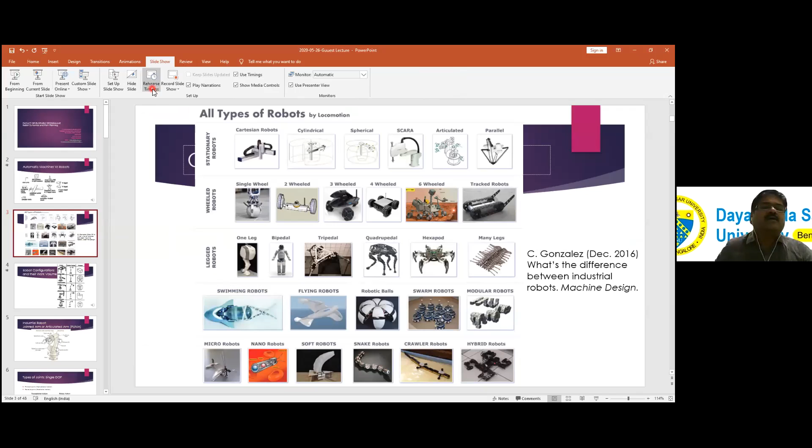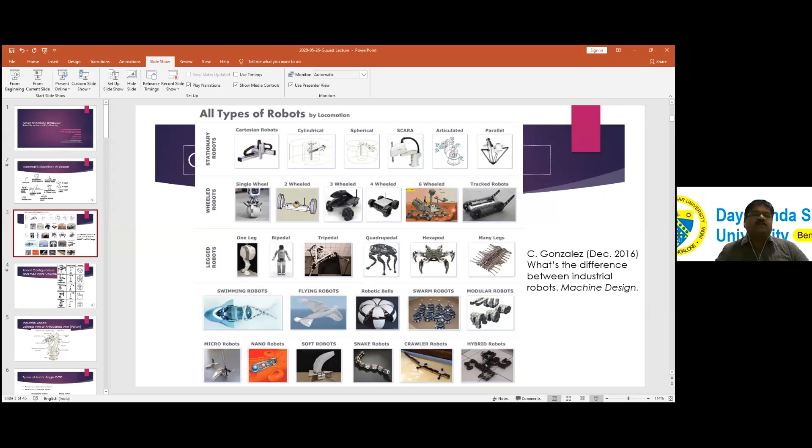By locomotion, we can classify robots. The first row are stationary robots, mostly used for industrial applications, depending upon the motion of the axis - in CNC machines also you call it axis. A Cartesian robot will move along the X, Y, Z axis, similar to a microscope used in the lab.

Cylindrical robots will have a vertical prismatic axis, and also rotational motion about the same axis, plus one linear axis. Spherical axis robots will have motion along a spherical coordinate system, with theta, phi, and the radial length r.

SCARA is another type of robot, usually used for low load applications. All the joints will be rotational except one prismatic joint, which may be either in the end effector or near the pillar as the first link.

This one is a Puma type of industrial robot, widely used in automobile industries. A lot of packaging industries, especially food packaging industries, chocolate packaging industries, and biscuit manufacturing industries use it, because their load is very less - a biscuit box or chocolate pack does not weigh too much. So for that, high productivity of assembly and packaging is required.

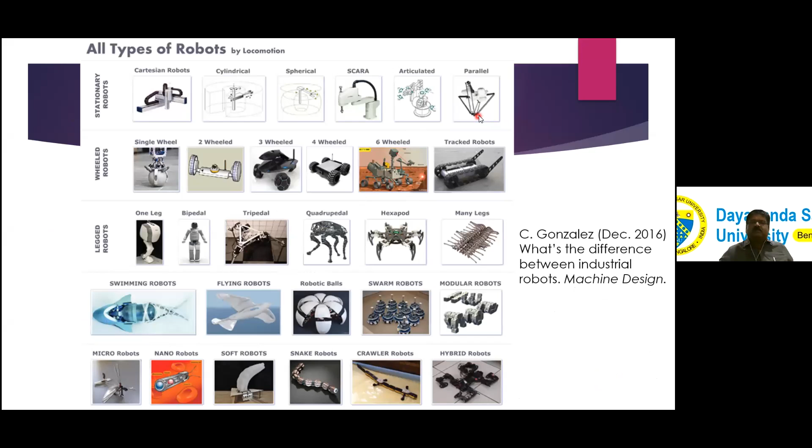So why do we need parallel configuration? For example, if you want to carry only a water bottle, you need only one arm. But if you want to carry a chair, you need to carry with both the arms. And if you want to carry a table, even if you use 2 arms, it's not sufficient. You need 1 more person or 2 more persons to support this.

This is called parallel manipulation. Parallel manipulation means more than one system, or one robot or branch of robot, is required to carry an object. So when the object is very long or very heavy, one robot, one or two motors may not be able to support the load.

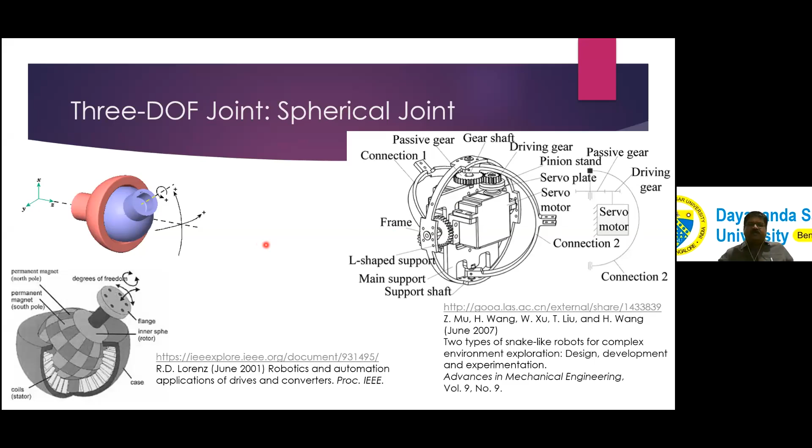A 4-bar mechanism cannot be used for robots, but you can see this kind of configuration. So let me just work out something. Please just wait for 5 seconds. Oh God, I don't see my mouse. Okay, so you see something now.

So this is called a 2-link robot, link 1 and link 2. This is a serial chain robot, because I'll have a motor at joint 1 and a motor at joint 2, only 2 motors will be required. It's a 2 degree of freedom system, because theta 1 and theta 2 will define the motion of the tool connected at the end effector. End effector is a general terminology to mean the tool.

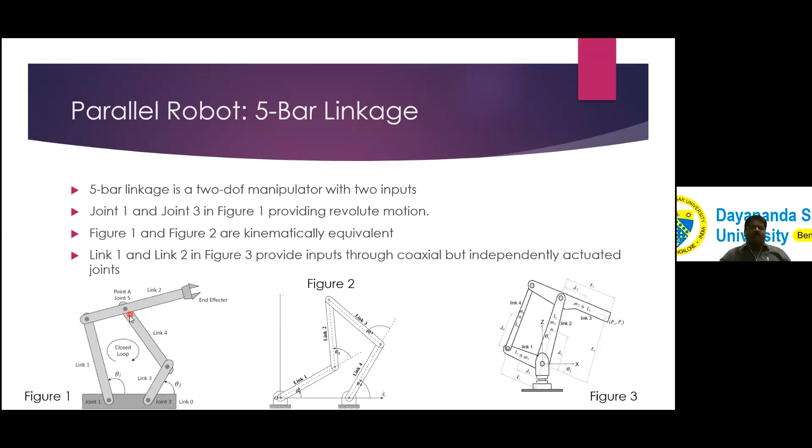Now look at the parallel robot configuration. Some of the joints will be idle joints, meaning they will be passive joints, versus active joints. Look at the picture here: joint 1 is active, there will be a motor; joint 3 will be connected to a motor. So joint 1 and 3 are active joints. This joint here, for example joint 5, will not have any motor, no power input, no torque input at joint 5 - it's called a passive joint. So parallel robots will have many passive joints and some active joints.

Another application is a 6-legged robot developed by IIT Bombay some 17-18 years ago. Here you see each of these legs is similar to a 5-bar linkage. This is called a parallelogram mechanism configuration, similar to a mini drafter, for example. Each leg is modeled after a mini drafter or 5-bar linkage. The advantage is you don't have any motor in the knee - the motors can be kept in the main chassis of the robot.

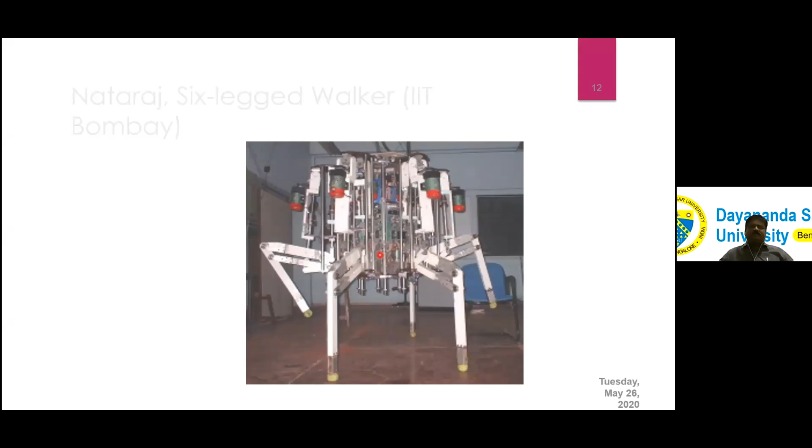But this robot gets signals from what is called a brain computer interface. It gets signals like EEG, from a lot of electrodes. These electrode signals are obtained, and they are decoded using artificial intelligence to find out what the person wants, whether he wants to raise his arm or lower it, whether he wants to open or close the fingers. Nobody can program these robots directly, so every motion of the artificial arm will be different every time; they will not be repeated.

Whereas in an industrial robot, the same operation is repeated thousands of times, so this is a different requirement. But even here you have to find out what happens if a robot joint moves faster or slower than required. Then it will fly away from the human person wearing it. So dynamics is very important here.

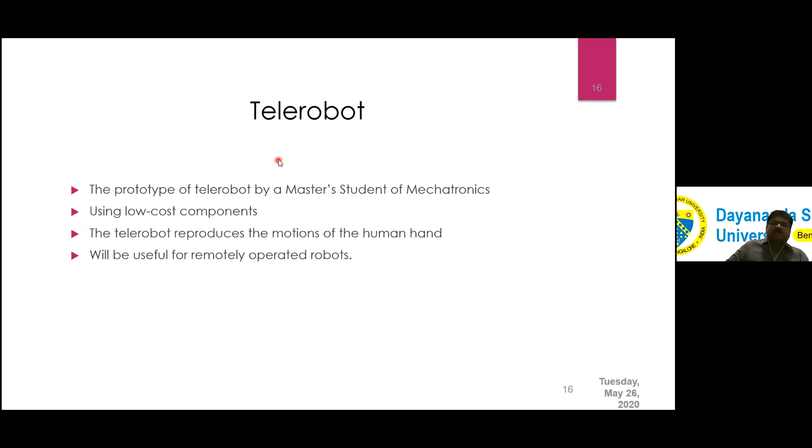You can use software like MSC ADAMS. ADAMS stands for Automatic Dynamic Analysis of Mechanical Systems. Any problem we discussed in mechanics of machines or mechanism analysis, whether kinematics, dynamics, vibration problems, or impact problems, can be done using ADAMS software. This software is now owned by MSC; it was originally developed by a professor at a foreign university, but MSC software has taken over.

So we use this software to model a biped robot, a two-legged robot - below the hip, only two legs connected by a common chassis, no upper body. One advantage of using the software is you don't have to know too much about the theory behind robot analysis; you just model the mechanism in the software. A little bit of basic theory of mechanisms is still useful, to understand the results produced by the software.

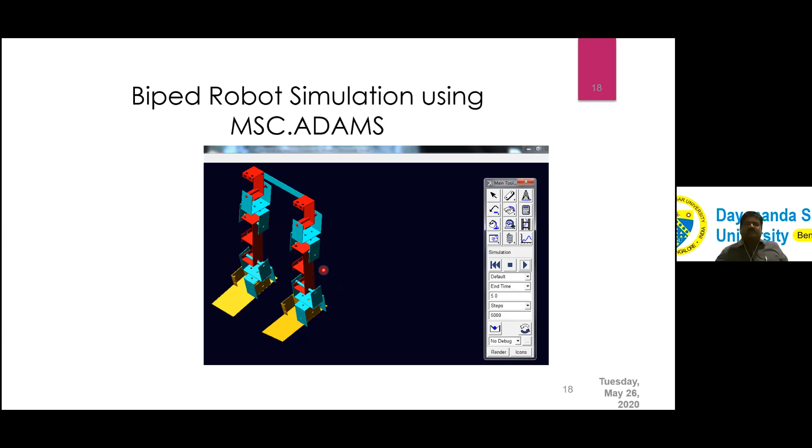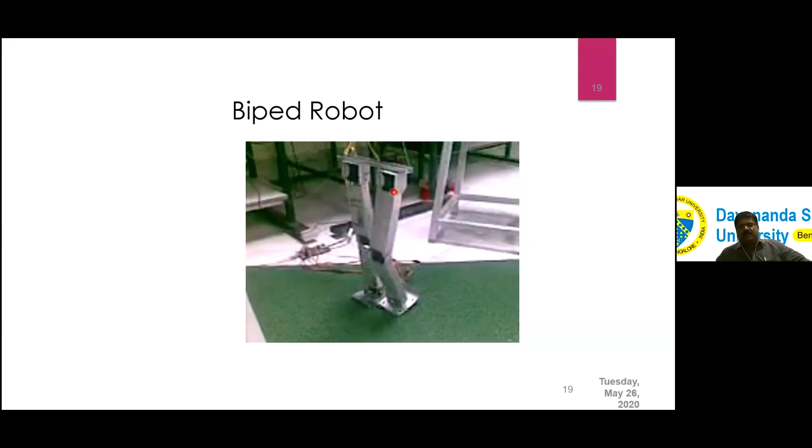This uses some low cost material and low power motors. We developed the structure using aluminum frames. But the problem with this structure is it cannot walk effectively, because the small servo motors we used may not be able to support the required amount of power. But we used it for studying the kinematics and making an initial prototype.

Now I will venture quickly into robot kinematics. We have 10 minutes left. I don't mind spending some more time, but I don't know, the audience may be impatient. So at this time, I'll give a break of 1 or 2 minutes for questions. It's not a coffee break, but we can have questions.

Yes sir, Mamakesh, Professor Elilarasu, can I ask? Yes sir. I have one clarification. Hello, am I audible sir? Hello, organizers, am I audible? I am Professor Ederson, sir, am I audible? Looks like somebody, I think Mr. Satyamurthy K, I don't have the power to enable your mic, so can you chat? Satyamurthy Garu, you can ask now to the speaker. Only the organizers can enable your mic, yeah your mic is enabled, you can please speak. Yes, just now enabled sir. Satyamurthy Garu, you can talk now, your mic is disabled again. You can speak please. I don't hear anything, please text your question. You raised your hand, please text. Ederson sir, you can talk sir. Yes, this is Dr. Ederson, am I audible sir? Hello? Or you can call my number on phone. Mamakesh? Yes sir, sir is not getting my voice I think so. Oh, everybody is at home, including the organizers. Hema Magesh, I think I see some Ilamaran, was he my student? I don't know. So you feel free to text, I don't know whether you can text, there's a chat option. So anybody else from the audience, any questions so far? Okay, I'll just move ahead.

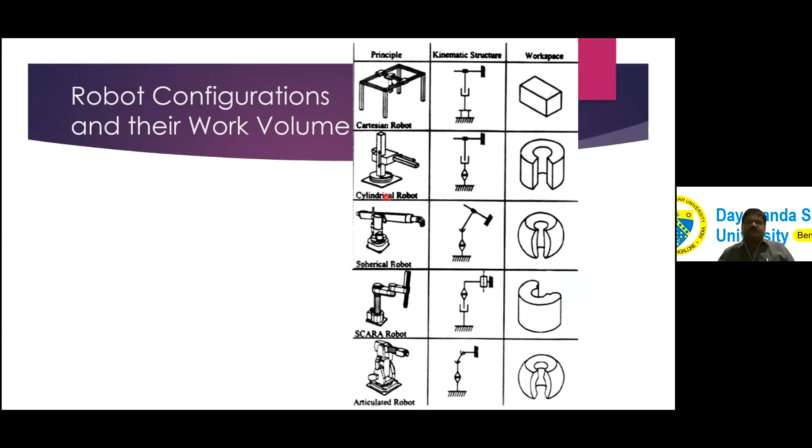Each joint, J1, J2, J3, are all angular joints in Puma. In the case of Puma, all joints are rotational, revolute joints. Each joint position is denoted by theta I; for joint I, the corresponding angular position is theta I. So you have theta 1, theta 2, theta 3, theta 4, 5, and 6. Joints 4, 5, and 6 are wrist motions, which are tool rotations and tool orientation.

In fact, J4, J5, and J6 together contribute the equivalent of a spherical joint. J1 is called the base axis, J2 is the shoulder, J3 is the elbow. J4, J5, J6 are the wrist joints.

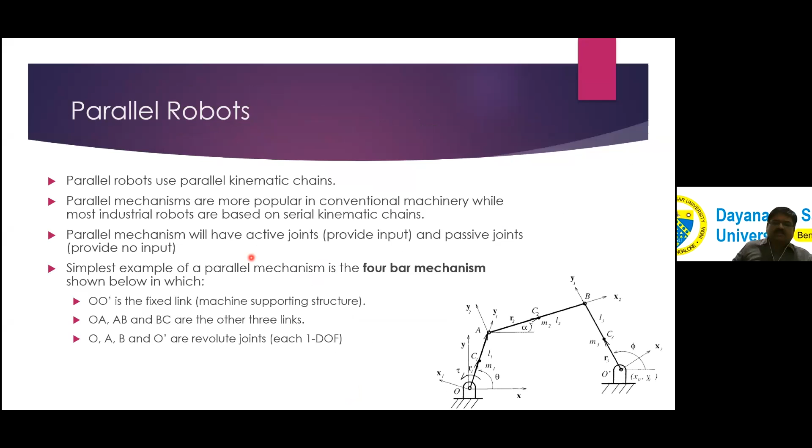Now, what is the purpose of position analysis? When the robot is in motion at very high speed, theta 1, theta 2, theta 3, up to theta 6 are all functions of time. They keep on changing every fraction of a second. So let's say, when the robot is operating at very high speed, I take a photo only, not a video. Then theta 1, theta 2, up to theta 6 have specific values. For given specific values of theta 1 through theta 6, I want to know the position and orientation of the tool. That is called position analysis.

What is velocity analysis? If J1 is rotating at angular velocity theta 1 dot, J2 at theta 2 dot, etc., up to J6 rotating at theta 6 dot, then what is the speed at which the tool is moving? The tool moves at x dot, y dot, z dot linear velocities, and also has pitch angular velocity, yaw angular velocity, and roll angular velocity.

J4, J5, and J6 together are called pitch, yaw, and roll. J6 is the roll; it rotates about its own axis. J5 and J4 are a combination of pitch and yaw motions. Pitch means up and down motion, yaw means left and right motion, and the sixth axis is roll motion about its own axis. That is velocity analysis.

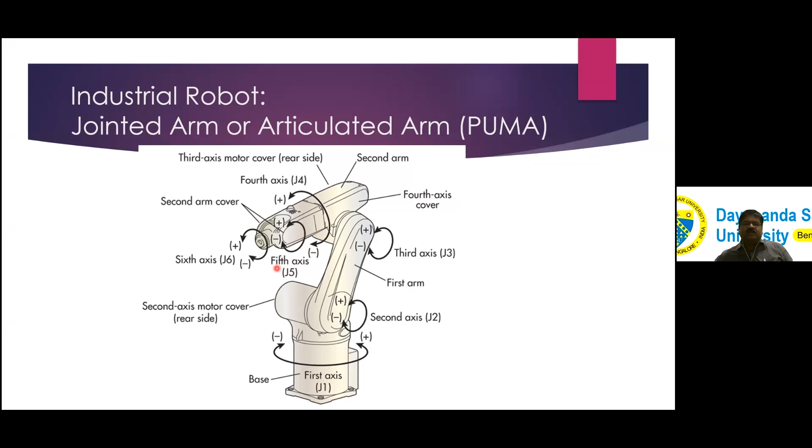So equations of motion form a set of coupled second order ordinary differential equations. Their derivation is done by two methods: one is the Lagrangian formulation, which is conceptually very simple, whereas the recursive Newton-Euler formulation is conceptually complex but easier, and it can be done in an iterative fashion.

Lagrangian formulation is easy for small systems—for example, to derive equations of motion for a simple pendulum, double pendulum, or 3-link pendulum. But for a snake robot, Lagrangian formulation would take weeks and has to be derived manually, whereas recursive Newton-Euler formulation may be computerized. In fact, a robot controller may continuously evaluate the Newton-Euler formulation. Using these methods you can derive the equations of motion, which is nothing but robot dynamics.

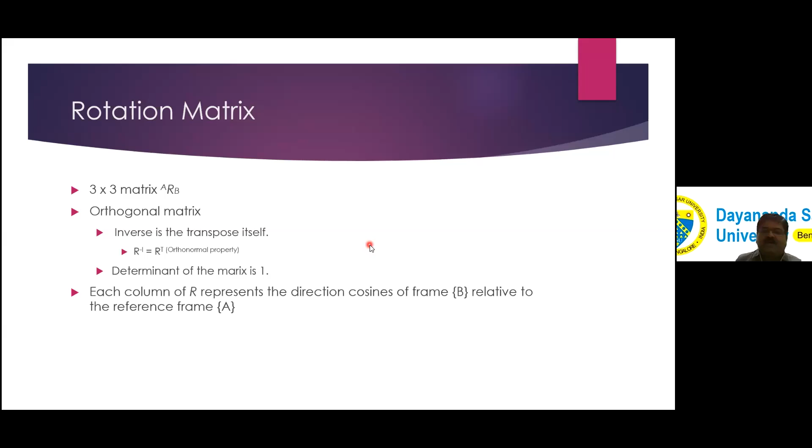The rotation matrix is one thing used for kinematic analysis. The rotation matrix is a 3x3 matrix, an orthogonal matrix. Its determinant is 1, and the combination of these two properties is called an orthogonal matrix. Each column represents the direction cosines of frame B relative to frame A.

Now why do we need the rotation matrix? Suppose I have an inertial frame or reference frame A, whereas the tool or object is held by the robot, with its position and orientation. Now each object or tool handled by a robot is of different size, shape and geometry. Therefore, mathematically, they are replaced simply by a coordinate frame. Similar to how every student is identified only by a roll number or registration number, every glamorous actor is identified only by vital statistics. Like that, we replace the actual body by a coordinate frame, because we are now interested only in the motion.

So frame B is called the body frame. It represents any body handled by the robot, a rigid body. The bodies are assumed to be rigid bodies. Any frame A is assumed to be a stationary frame. But their roles can be changed — A can be a moving frame, B may be a stationary frame. It doesn't really matter whether A is stationary or B is stationary, or whether both are stationary or both are moving. The only thing is one is the reference frame, the other is the moving frame.

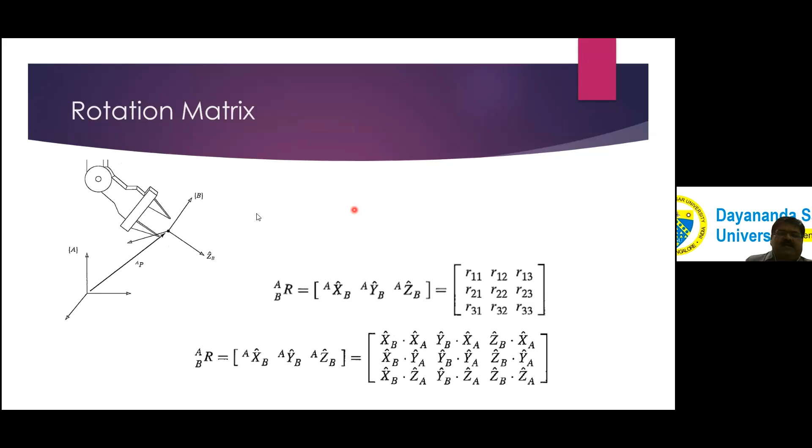Okay, so between B and B dash, some rotation has taken place. So we can have a rotation matrix of B dash relative to B. Then we have a rotation matrix from B to A also. Both of them can be multiplied together to obtain the rotation matrix of B dash relative to A. This is called finite rotation. Finite rotation matrices are used to describe the position of points referred in one frame with respect to another frame. Now, this finite rotation can happen in a sequence.

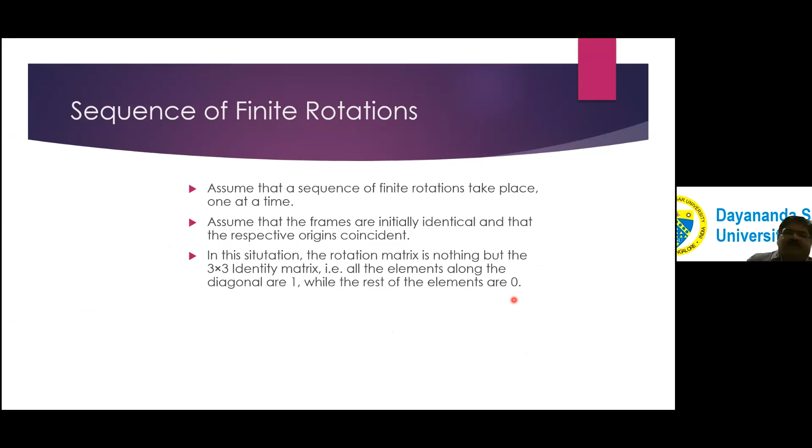I'll give you an example of a DH transformation. There are certain rules. Initially you assume that the rotation matrix is an identity matrix. That means initially you assume that both the reference frame and the other frame are one and the same, therefore the rotation matrix is identity matrix. If the rotation occurs about an axis of the reference frame, then pre-multiply the rotation matrix. Otherwise, post-multiply. Repeat the above rules until all finite rotations are considered, and the resulting rotation matrix is called the composite rotation matrix.

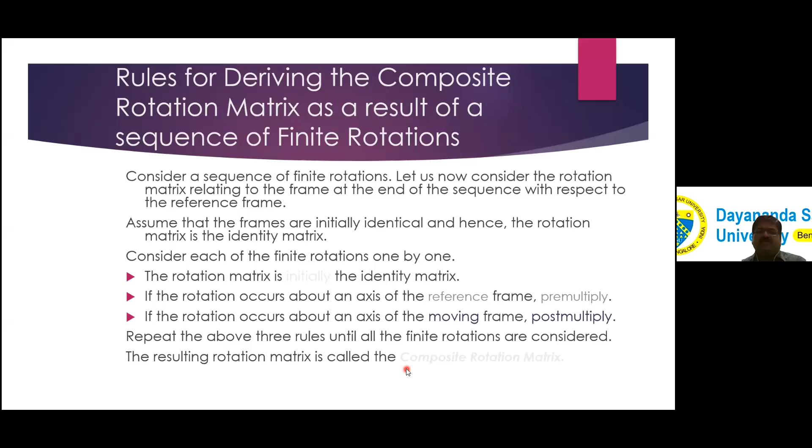Now, there is also the homogeneous transformation matrix. The rotation matrix is a 3 by 3 matrix. As I told you, the rotation matrix describes only the orientation of B relative to the coordinate frame A. What about the origin? The origin of A and B are different. So that is represented by the position vector P of A. Let's say the position vector P, when referenced relative to A, is given by Px, Py and Pz.

I am adding one more column, then it becomes a 3 by 4 matrix. Then I add one more row, that is called the homogeneous matrix. If I add one more row, it becomes a square matrix, and the square matrix will be the homogeneous matrix. Look at this: Px, Py, Pz is replaced by Px, Py, Pz, then a fourth element, 1. Px, Py, Pz is the position vector, with another number, that is called the homogeneous form of the position vector.

Why do you need the homogeneous form? Because this number at location row 4, column 4, is the scaling factor. It's called the scaling factor. What about these 3 zeros? The first 3 elements in the last row, the bottommost row, define the perspective transformation.

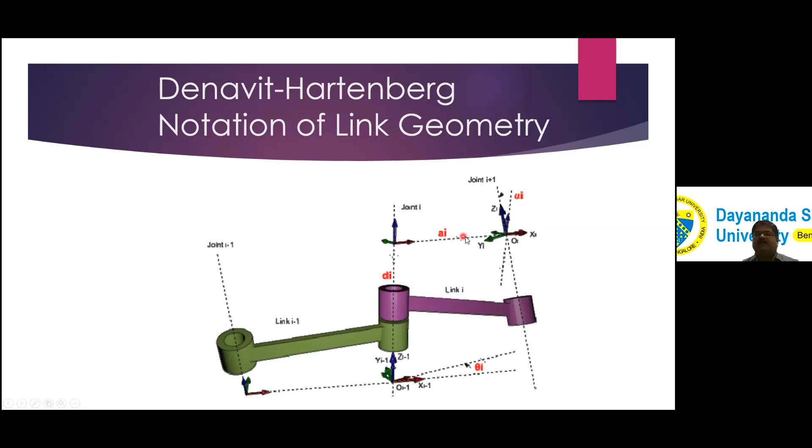Following this, one more rotation and you can achieve this. How do you do that? I may not discuss much, but this is the procedure to obtain it, following four operations, four transformations: T1, T2, T3, and T4.

Following T1, T2, T3, T4. T1 is rotation by alpha about xi minus 1. T2 is translation, meaning linear motion by a distance a along xi minus 1. T3 is rotation of theta about zi. T4 is translation by a distance d along zi.

Then I define S1 as the matrix multiplication of T1 and T2, S2 as the matrix multiplication of T3 and T4, and S as S1 multiplied by S2. Matrix multiplication is not commutative, so you have to be very careful in following this order.

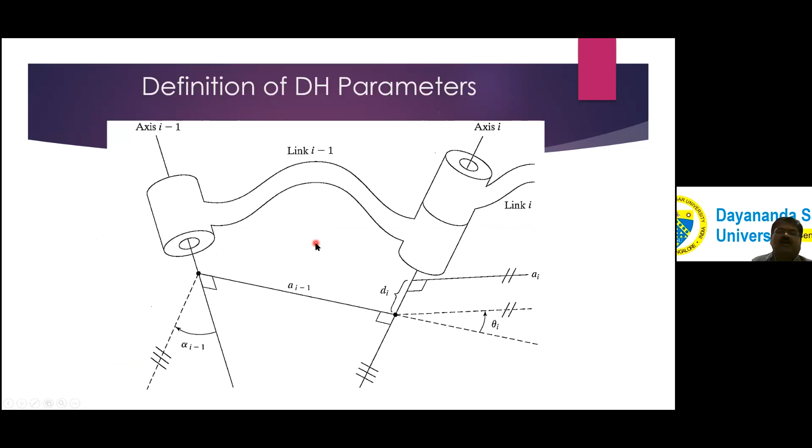This is how, for each robot, you formulate this table, called the DH transformation table. Once you have the DH transformation table, you measure all these parameters, either from the drawing or the CAD model, or physically for the robot. Then you substitute the values into this matrix and you get the DH transformation matrix. Multiply all the DH transformation matrices and you get what is called the zero to n solution.

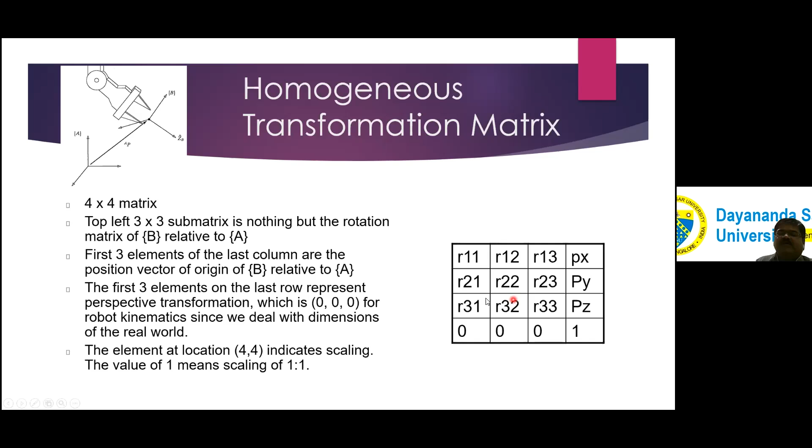Now the zero to n solution is nothing but the homogeneous transformation matrix of the nth coordinate frame, or nth link, with respect to the zeroth link. That will be in the form of a 4x4 homogeneous transformation matrix. PX, PY, PZ represent the position of the tool with respect to the fixed point of the robot, and orientations can be obtained from these 3x3 matrices.

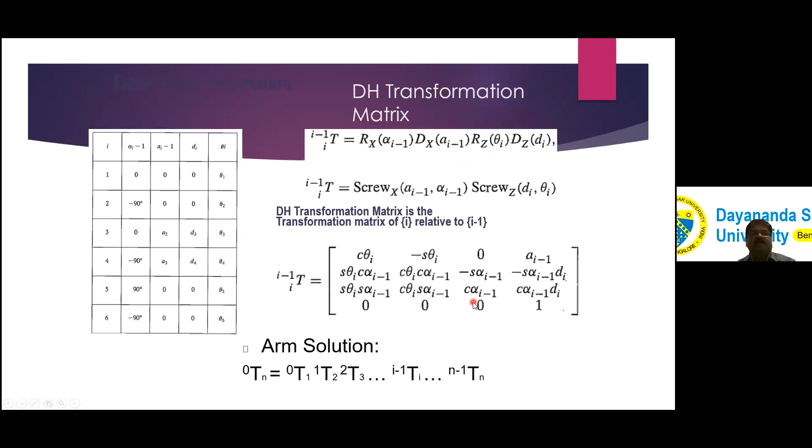Okay, so with this I complete today's presentation. Of course, I have not covered dynamics, and these figures you may find from several textbooks.

And then, okay, I'll just take a phone call. Already it's 5:35, I don't want to.

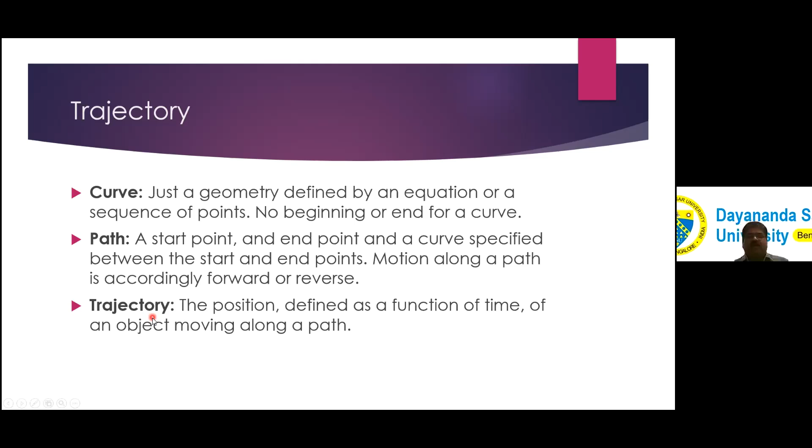You can please read what is the difference between curve, path, and trajectory. Actually it is trajectory planning, not path planning. Path planning means only the geometry: starting point, end point, and the curve. Trajectory planning means at each point you have to identify what should be the velocity. Path is like a railway track, whereas trajectory is the actual journey. There is a Cartesian trajectory and a joint trajectory. Cartesian trajectory is about the tool, whereas joint trajectory has to be calculated for every joint.